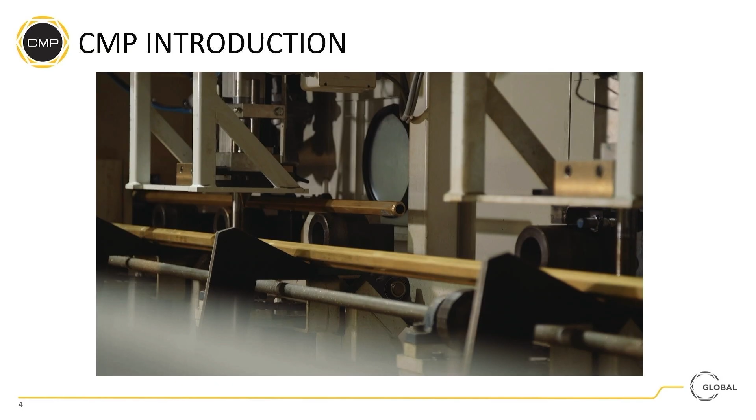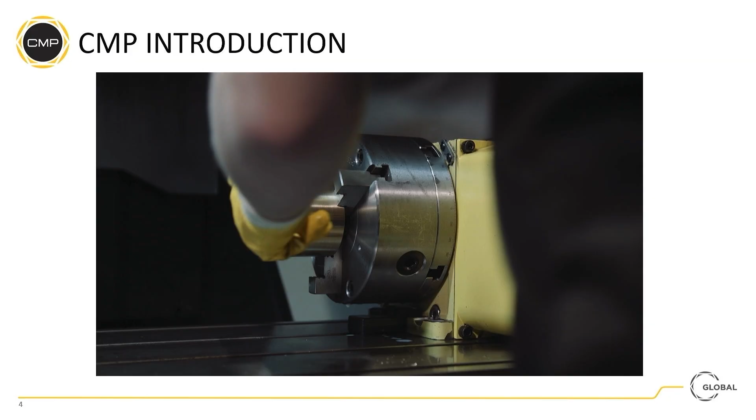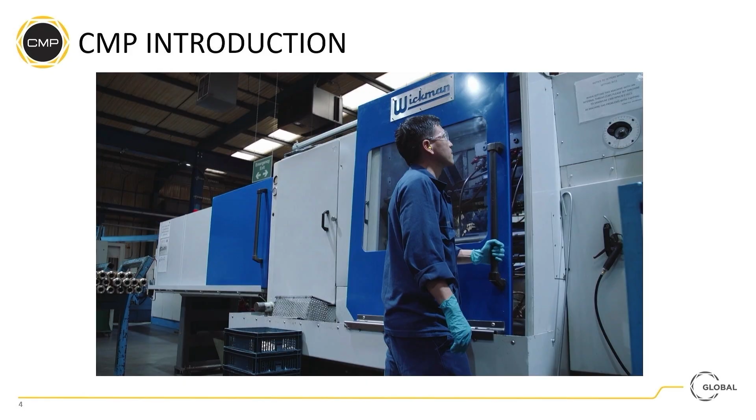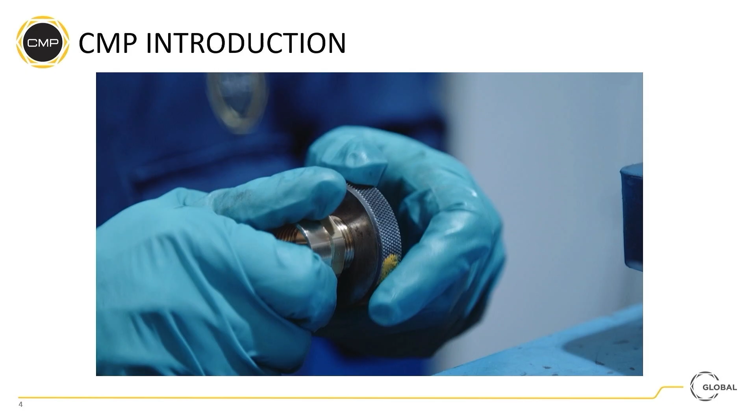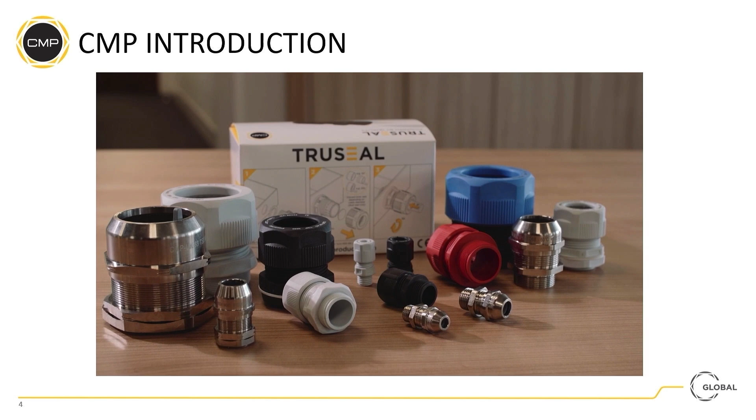Okay, this is the short brief video about our UK operations.

So like for me, I stay in Vietnam. Vietnam, we don't have stock, but we have offices over there also.

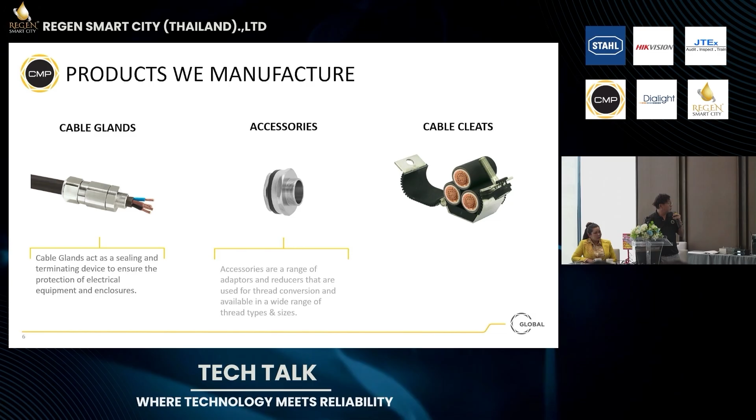So what CMP products manufacture: cable glands, accessories such as washer, lock nut, adapter, reducer, and also cable cleats. If you see the video just now, most of our products are manufactured by automation machines. Only humans - basically what we do is that installers just install assembly according to the parts. All parts are basically manufactured by machines. So we have these three main core products for CMP.

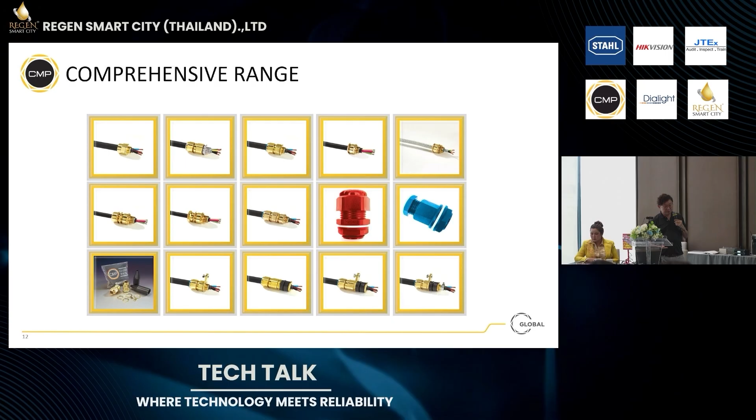Okay, basically, if you want to see our catalogs, we have a catalog of our full range on all our cable glands for EX, non-EX, and our products come in brass, nickel plated brass, stainless steel, and this is all the lock nut accessories.

So we have the lock nut, we have the earth tag, we have the serrated washer, stainless steel, this one, then serrated washer, and the PVC shrouds. And these are all the adapters, plugs.

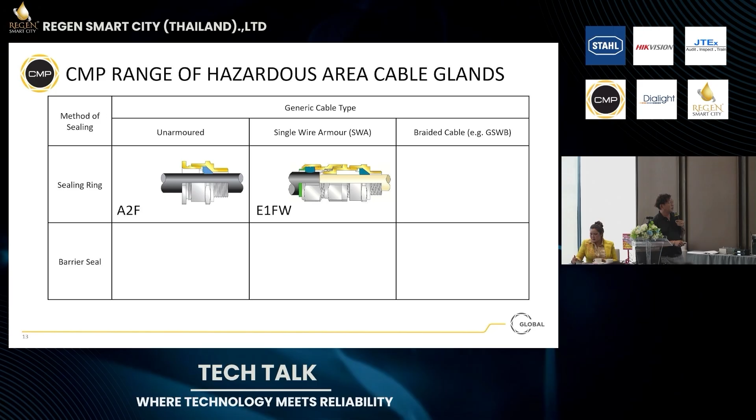Okay, for the hazardous EX cable glands, for non-armored cables, basically this is the A2F that we are using for EX. And then this is the single wire armored E1FW. This is the one with the outer sheath and inner sheath. And E1FX, the braided type.

We do have this PXSS2K - this is for the barrier gland for non-armored cables. And PX2KW for the single wire armored barrier glands compound. And also PX2KX, the braided type.

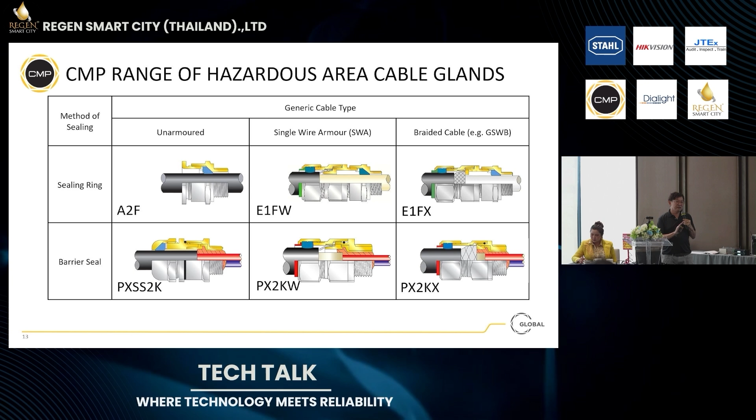This is our standard models, but we have new cable glands coming out. I'm going to show it to you.

Okay, this is the safe area, non-EX, so A2 - these are the part numbers, CW, CX.

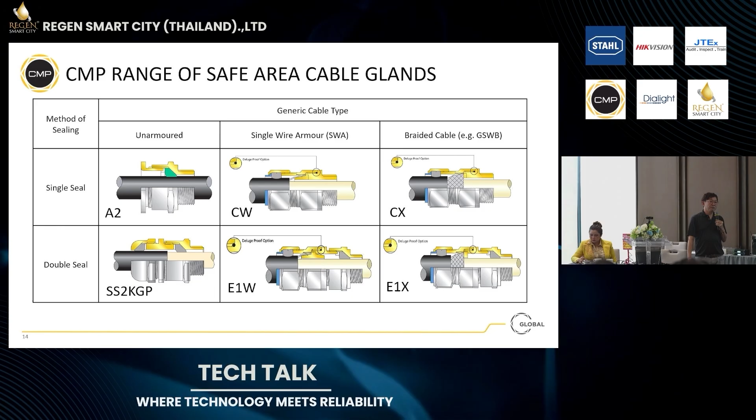3 years ago, I think, by the way, CMP acquired a manufacturing factory in India. So our A2 CW for safe area are now made in India, to bring down the cost lower. Because now I think for those industrial cable glands are basically very cheap - you have other competitors like from China, they are very cheap. So that's why we bought a plant and do our production there for A2 and CW. Price is very competitive, quality the same.

What is the function for a cable gland? Basically, for the outer sheath it's for IP protection. It protects against dust and moisture, and also holds the cable, to ensure cable pull.

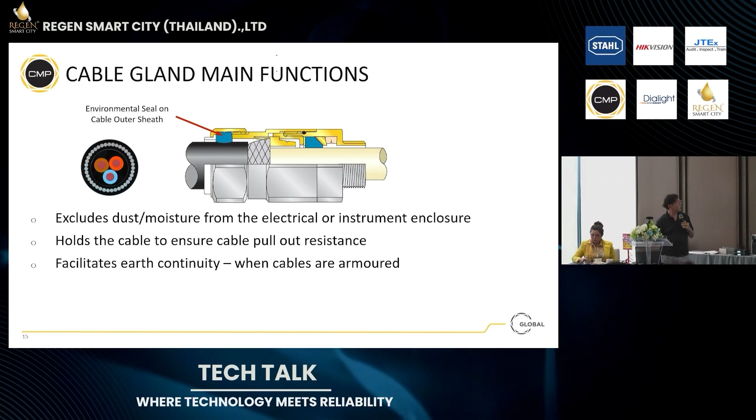And this part is a ring, an armored ring which provides earth continuity. Later you can see the samples over there. We have the samples there. Maybe after this we can show you.

And then this is the important one, the explosion proof protection seal, we call it inner seal. It protects and maintains the integrity of the equipment. What does it mean? For example, if this is EXD, EXE, this is the one who prevents the air from coming in.

So for cable entry device shall maintain the integrity of the equipment that is connected. What does it mean? It means that, for example, if your box is EXE, you have to use EXE cable gland. If your box is EXD, you have to use EXD cable gland. You can't use EXE. So this is what it means.

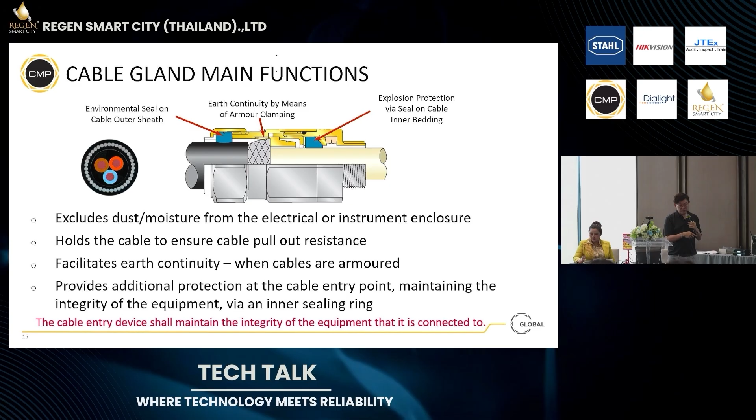And this is CMP, we call it this compensating displacement seal, and this is the one. We have this seal, and in addition, we have this white color one to absorb extra force. The seal been going deep inside. You can take a look.

So basically, if you see this is metal to metal, the clamping on the seals, metal to metal, this is the correct one. So if metal to metal, sometimes even this one goes in metal to metal, it will go in deeper. This one basically will slide along nicely, or maybe a slight dent. It is okay.

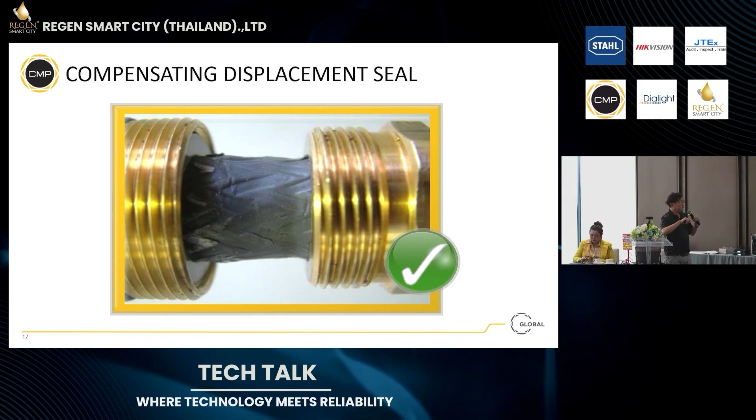Now the difference seal is over here. The normal compression seal by others, basically you'll see it eat a lot inside, and long time you will see core wires. And this is displacement CDS system, our patented design. You will see it's only like this a bit. So there's a big difference here.

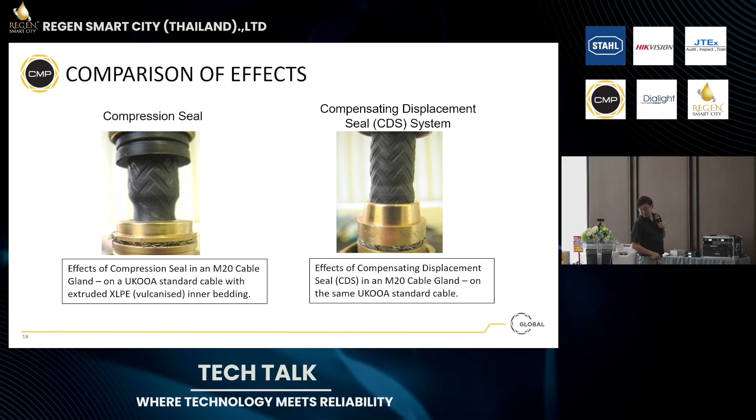Now, how to select cables? To use a cable gland, the cable firstly must be round, fully round. And also, it must be compact and full of fillers. It means internally it must be hard. It cannot be without fillers.

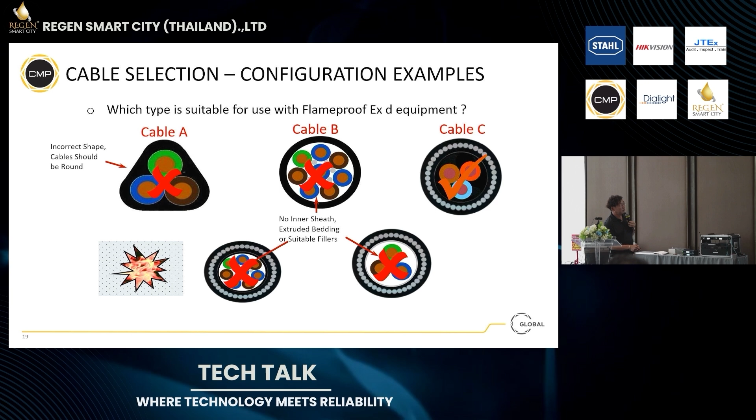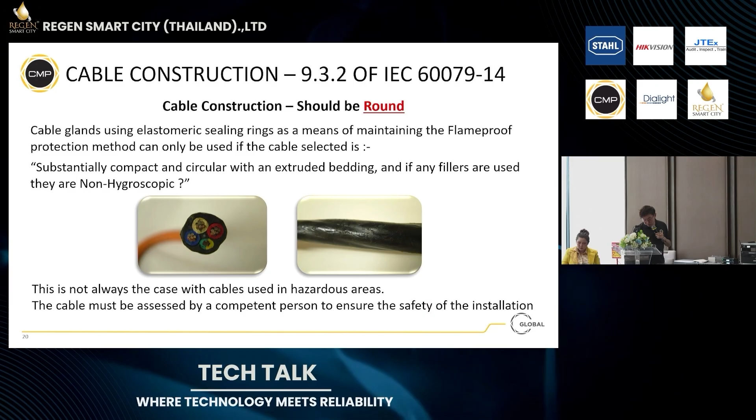So cable gland using elastomer sealing ring means maintaining the flameproof protection method. So you will see if you have this type of inner bedding, or now because of the cost price, they reduce the cost for the manufacturer. They use very soft inner bedding. So it will cost unround. So you have to use barrel gland instead of E1 series.

Now this is the barrel gland. For the traditional one, this is the compound. We have compound A, compound B, clay, mix it together, and then we slot it in and wait for 8 hours to cure. So this is a very traditional method.

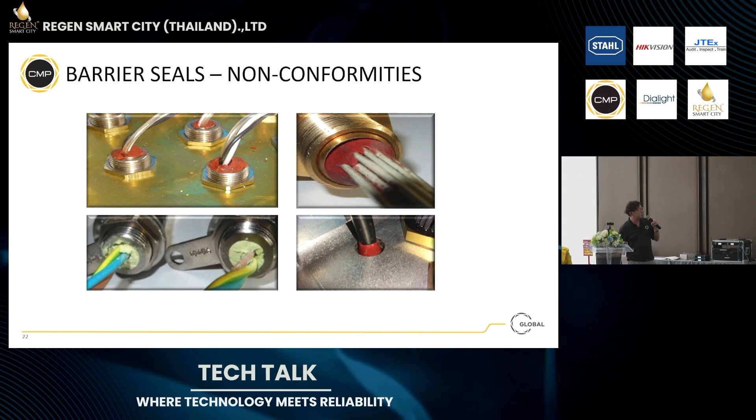But we have something new. Now this is the picture of the compound that we have done. Now, our new product here is basically this one. For example, for compound, you press the compound, and then sometimes you're pressing in, but sometimes there's still gaps that cannot be fully filled.

So we have changed this one to liquid resin. That means you use the injection, you inject the liquid all the way, and liquid can fill everything, fully fill. And the curing is only, okay, for this type is 40 minutes.

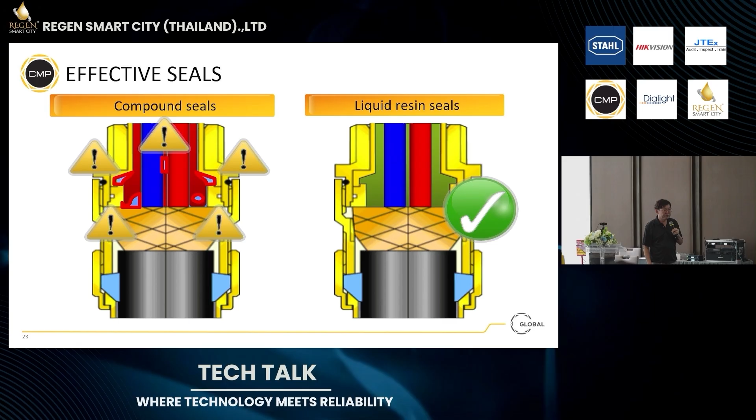But we have a new patented liquid resin seal, which cures in 15 minutes. Okay, 15 minutes, very fast. No other competitors that we have on this.

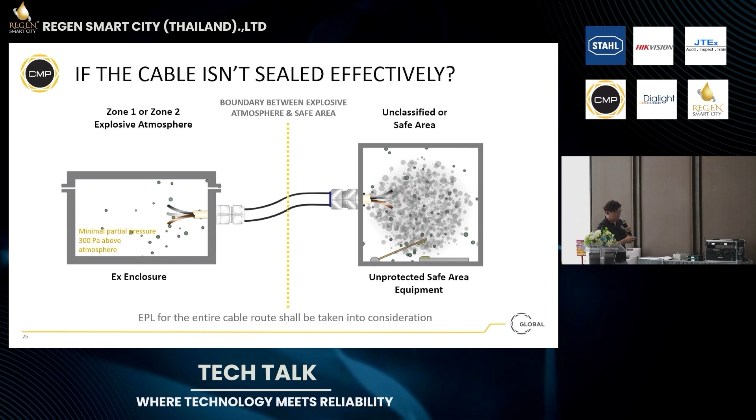Okay, talk about the zone 1, zone 2 explosive. As long as it's 300 PA, you have to use EX cable glands. And for the safe one, you see, actually, if this is not secured properly, even the safe area might do an explosion also. So this is very important over here.

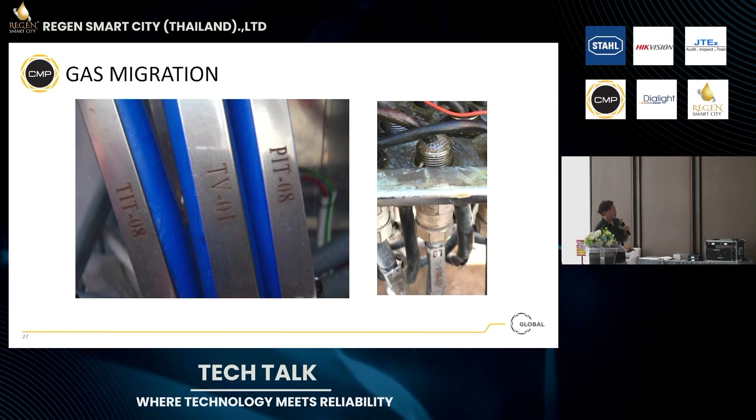And basically, it's also shown through gas migration. You see, bubbles over here. If the cable gland is not installed properly, you will have this type of gas migration.

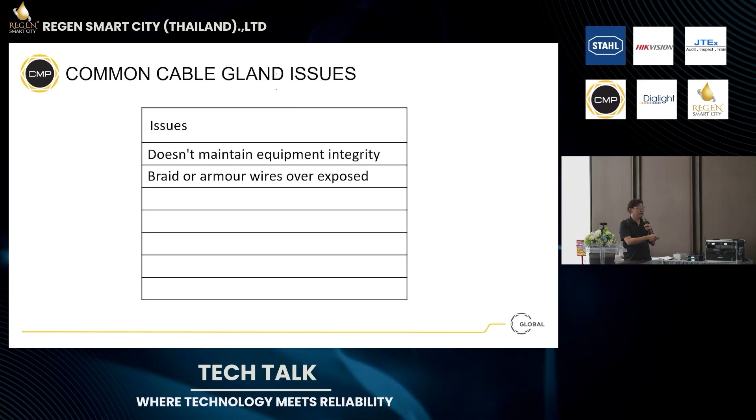Then, braided armored wire over-exposed. When you install the cables, the wire and the braided, they cut too long. When you install it, you will see braided outside, which is not correct. Braided wires are not allowed to show outside the cable glands.

Missing sealing washer. This is always like, when installers go in and do their work at night, sometimes they drop it, they can't see, so sometimes the sealing washer is missing.

So these are a few issues, and over-tightening. For cable glands, basically you use your hand. For M20 glands, you use your hand to tighten until you cannot tighten anymore, then you use a spanner, 2.5 turns, then it will be okay. But somebody, they over-tighten it, and then you will damage the inner seal.

And also lack of continuity. Why is there lack of continuity? We have the armored ring, which they drop or didn't put in. Cable not secured effectively. And water ingression problem.

For us, we provide free training to our customers. So if you have a project, we will get our guys to do the technical training on site. That means we will show them how to do the installation, and then the installer will do their own installation, and then we will see whether they are okay or not.

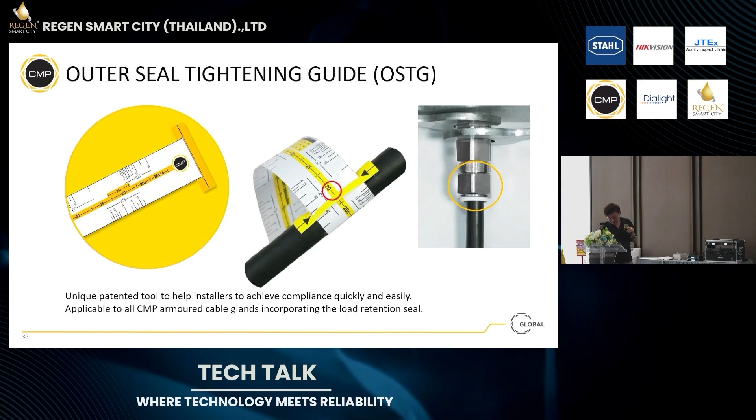For projects, if you have a cable schedule and have confirmed your cable size, send the cable data to us and we can do the sizing for you. Once the purchase order is received, we will send the gland stock, goods receive, and FOC training for all installers. Then we issue certificates and project documentation, for example IEC certificates, certificate of origin, and so on. Please don't feel shy to send us all the cable data and we will do the sizing for you. We guarantee that if there's anything wrong with our sizing, we will do the replacement FOC also.

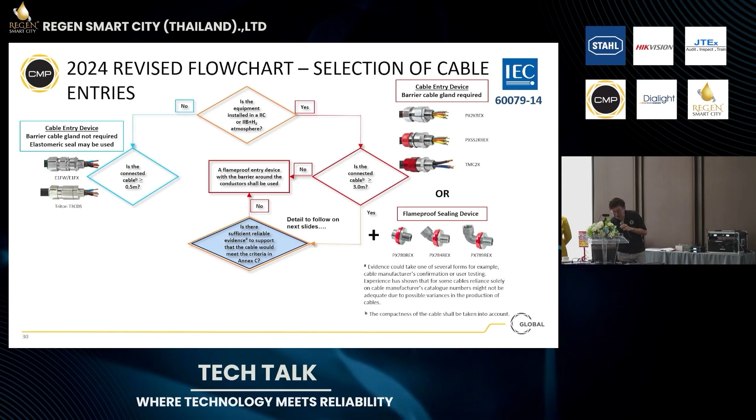Sorry, give me a minute. Now,

For CMP, this T3 CDS is basically our premium product. This one any installer can do, as long as this metal and this metal go together, touch together, metal to metal, and the armor is already sealed or crimped properly. Whereas for our displacement one, you need the OSTG ruler to make sure it's crimped properly for the correct number of turns, not over tightened. That's why for the E1 series we need training. The price is lower, but we need training to maintain a good condition.

So for T3 CDS, even an idiot can do it, because as long as all the parts are metal to metal and the clamping is secure nicely, basically that's it.